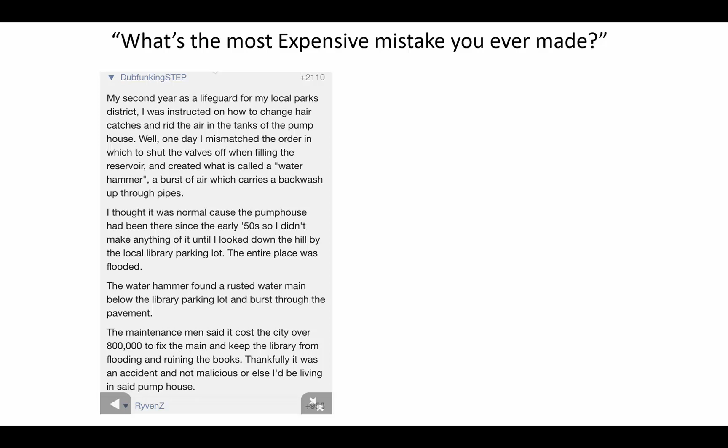That's brutal. So this person, I don't think, is a hydraulic engineer, and they haven't exactly described what causes a water hammer, but they have described the stakes. You know, if you have a water hammer and haven't prepared for it, or if the system isn't designed to prevent it, then it can be a very costly problem. So that's what we're going to be talking about today, is what causes water hammer and how can we prevent it.

All right, well, let's watch a couple of videos that illustrate what water hammer is. These are some real live illustrations of water hammer, and then an old-timey video. It must be from the early 80s, but man, I really like it. It just shows water hammer so effectively. So let me pull up these videos to show you what water hammer looks like and how you might encounter it in the real world.

I've clicked on the link here. Hopefully it's bringing up somewhere. I'll just copy and paste that into a separate tab. That may ultimately be a little bit easier. All right. We may get some commercials we have to suffer through. We don't. Not on this one anyway. All right, water hammer.

So, the sink was opened and then is being closed very rapidly. So let me start at the beginning in there. So the faucet is running and then is being closed very rapidly. Okay.

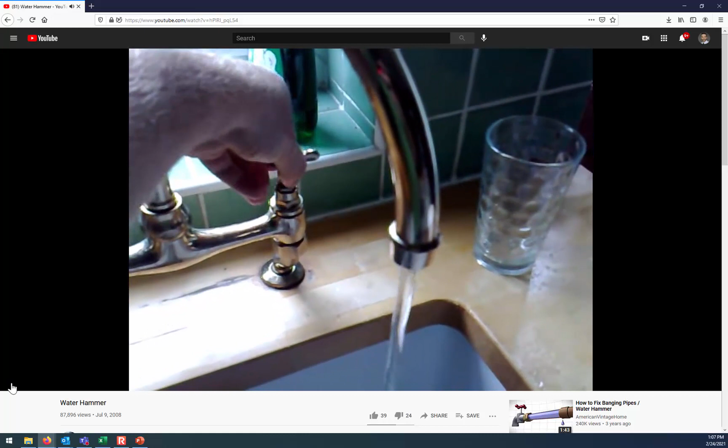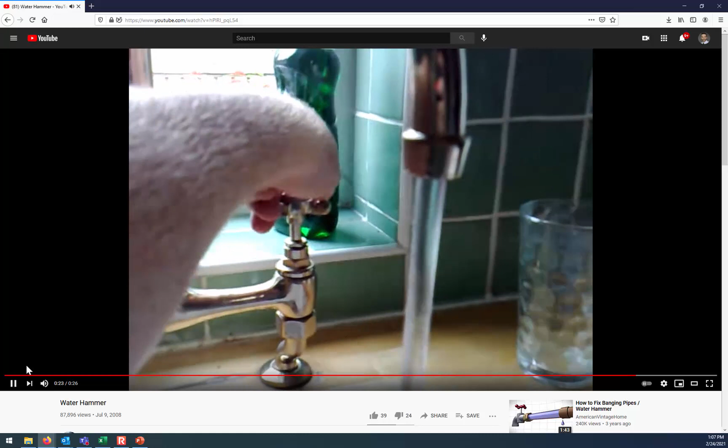Okay, so those quick changes to the flow rate is what caused the phenomenon that we're seeing of this rapid change of, it kind of looks like a sputtering or something. So that's our first physical manifestation of water hammer.

Let's look at another. Let me just copy over the link for this next one. Somebody's washing machine.

We're going to have the commercial for this one. We don't have to listen to it though. Oh, all right. Hopefully you get the system audio.

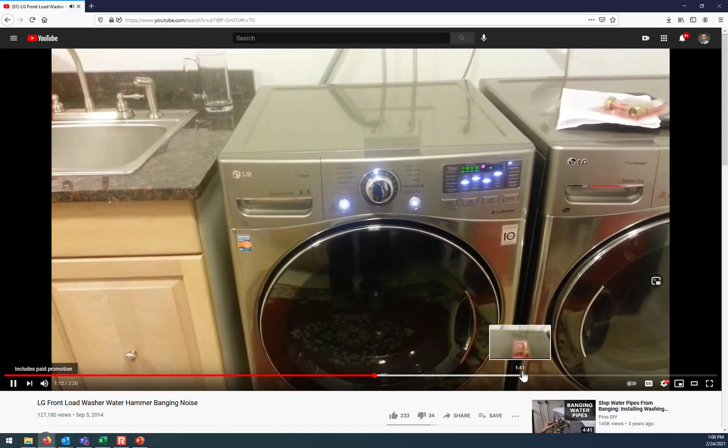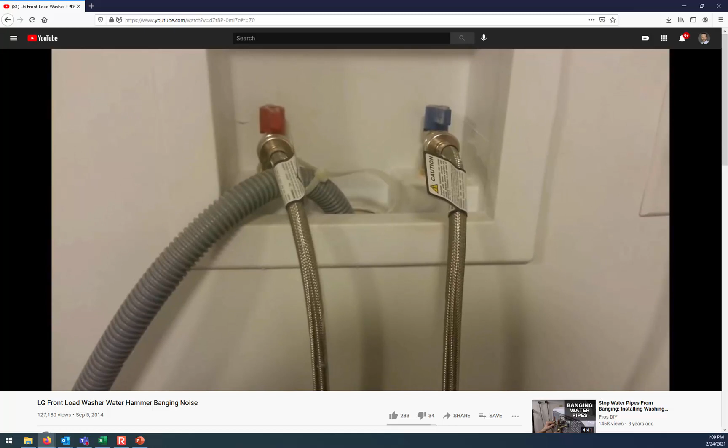I'm not sure. Okay, you heard that noise come from the pipe. I'm going to get closer. We're going to see the action over here. You see the whole pipe shake. That's from the cold water valve. And there's one solution to take care of this problem. You actually have two. You either lower down your house water pressure, or you have to get yourself one of this guy called a mini water arrester that you can pick up in a plumbing store.

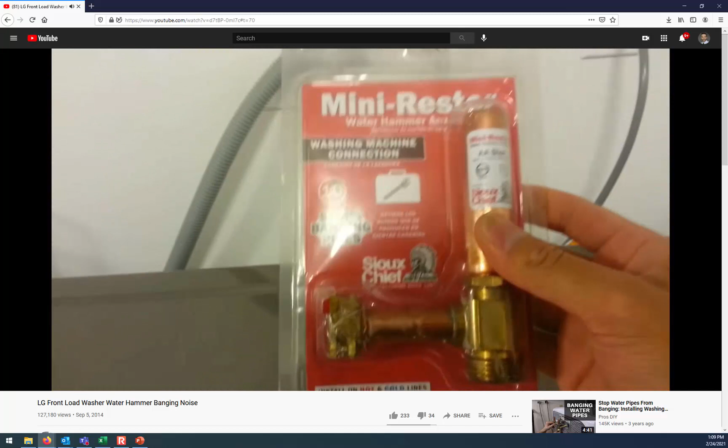Okay, so what's happening here is that the washing machine is drawing some water from the line, and it's opening and closing the valve really quickly, and so it's kind of sending a shock wave through the entire water system as the valve is being opened and closed almost simultaneously, bringing in a little bit more water for the load. And what this person is suggesting is that there are these shock absorbing systems that can be put in line, and it's almost like a spring in there that the shock would work against rather than reflecting its way down the line entirely.

So let me just show you one more video, and I've saved the best for last. This is one where, even though the equipment looks a bit old and dated, it does a great job of explaining what is the cause of water hammer.

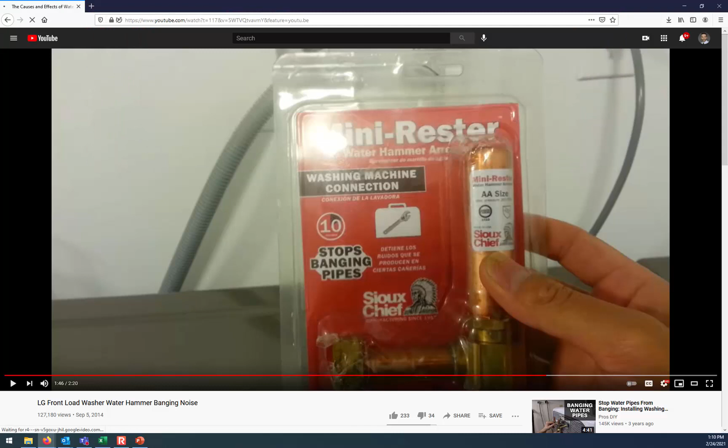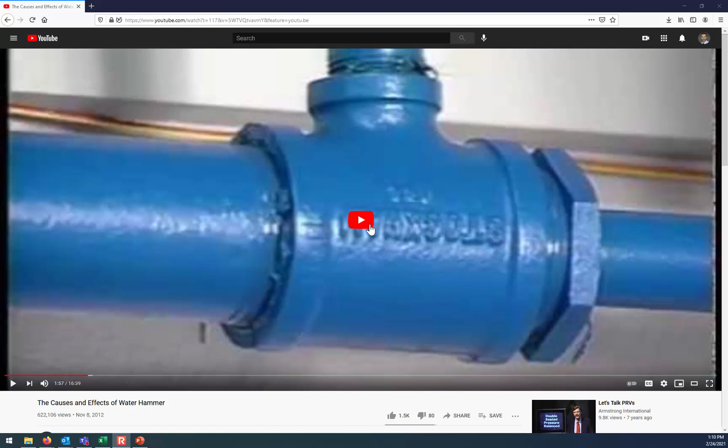Hydraulic shock occurs. Been mentioned so far, the key idea of momentum, that you've got this body of water that's in motion in the pipe. It's headed towards the outlet, and the valve that was closed there, that ball valve, just with a quarter turn instantaneously will have the water going 10 feet per second, and then it's going 0 feet per second. And so all of the force of that water strikes up against that valve that's been closed, and then the shock wave goes the other direction. It may terminate at a water heater, at a reservoir, and then it reflects back again towards the valve a second time. So this is momentum.

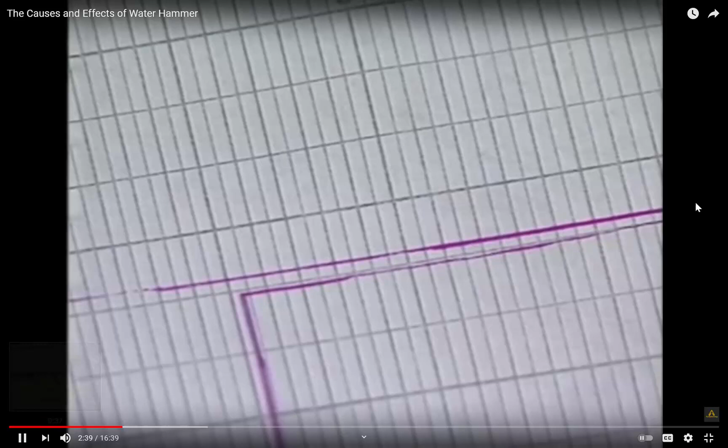The water's moving and suddenly stops. And that's what causes this hammer. It's just like a physical hammer, force divided by area. You've got the force of the water stopping very suddenly. By closing the valve slowly, the velocity of the water is reduced before the column is stopped. Water hammer may also be initiated by thermal shock.

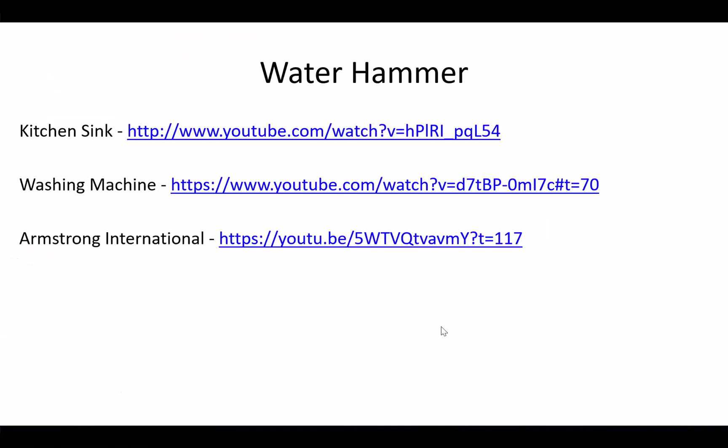All right, we're not going to talk about thermal shock, but that gives you the idea of some of the causes of water hammer. And let's talk about it on a fundamental level by looking at this diagram that comes from our textbook.

Okay, so what I'd like you to envision is a tank that's open to the atmosphere, and there's a pipe coming from that tank. It could either be horizontal or it could be inclined. It doesn't necessarily matter. This is showing it as inclined just to make the point that the phenomenon exists regardless of the inclined path. And so there's some water velocity initially. We've got a valve that's open, and so flow is going through the pipe.

And let's consider the pressure situation as flow is going through the pipe. We know that there's going to be head loss, and so here this is indicating that there's some h_f. So the head loss that occurs is because of the pipe friction. As the water is flowing through the pipe, there's a resistance to flow at the boundary between the water and the stationary pipe material. And the pressure is decreasing in the direction of flow. So this valve is open.

Then, if we consider a certain control volume, think about the flow that's going in and the flow that's going out of that control volume right now when the valve is open. The inflow and the outflow are equal at this current steady state.

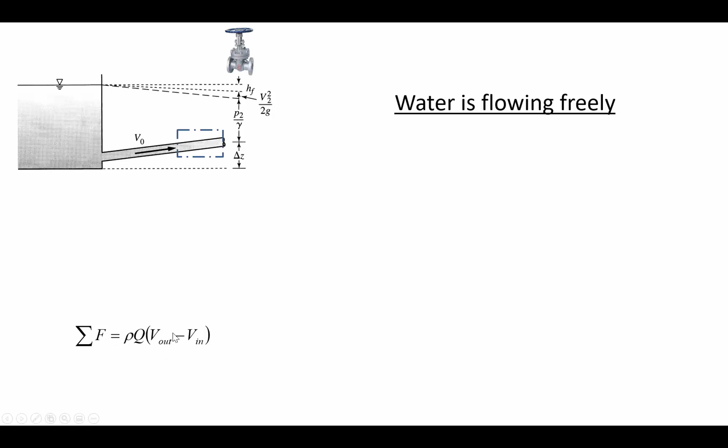So if we were going to consider this through the momentum equation, there's not going to be any imbalance in forces right now because the outflow and the inflow are equal. And the momentum force only occurs when the inflow and the outflow velocity is different.

So if the valve is suddenly closed, then what happens is, in this same control volume, for just a brief moment, there's an accumulation of force up against the valve because temporarily the flow in is greater than the flow out of that control volume. So there's an imbalance in the velocities, which causes an accumulation of force up against the valve. And that causes pressure to build up.

And now what we have here is that when the valve is closed, there's no longer any frictional losses. And so looking here, this dashed line, the lowest dashed line, refers to the energy grade line. Now it's flat. And so it's flat because there's no bulk flow. The water isn't moving through the pipe anymore, even though if you go a little bit further away from the valve, the velocity is still forward. There isn't a net flow through the pipe. It's just this temporary, instantaneous moment where the momentum really hasn't caught up with the entire column.

Remember, the water is just a little bit compressible. And so the pressure wave starts propagating backwards towards the reservoir, and the speed that it does that is called the celerity. And so here you can see C. That's referring to the velocity or the speed at which the shock wave is going back away from the valve towards the reservoir.

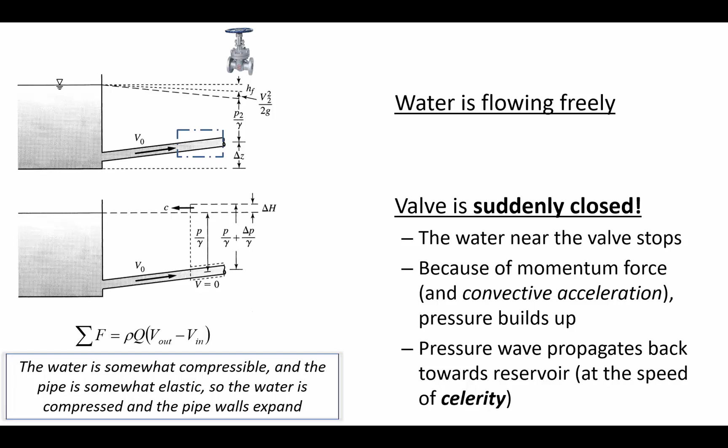So as we go further steps through the process, there comes a point where the shock wave makes it all the way to the tank. At this part, the shock wave was only part of the way through the pipe, but the shock wave is moving its way through the pipe, and this whole process is very, very fast. We're talking about milliseconds. So it's moving from the valve back towards the tank, and now at this point, the entire pipe is expanded because the shock wave is all the way through, and so everywhere inside of the pipe, there's an increase in head, and also there's a little bit more water inside of the pipe than there ought to be, because remember, the pipe expanded, it swelled, so to speak.

And so what's going to happen is that pipe is going to start to not collapse, but it has swelled and expanded, and it's going to contract again, and that's going to force water into the reservoir. And so in the return journey, the shock wave goes from the reservoir back towards the valve again. Here you can see the C is indicating the direction and the magnitude of that celerity as the shock wave moves from the reservoir back towards the valve, and then the water is flowing from the pipe into the reservoir as the pipe contracts. And so it's a wave of decreased pressure heading towards the valve this time. And that process is called wave reflection.

And it can happen several times. In the video that we just watched a moment ago, when they closed that valve really quickly, you could see on the little plotter that they had that there was a big spike in the pressure, and then there was a little spike. It was kind of like aftershocks or several subsequent waves that progressively got smaller because some of

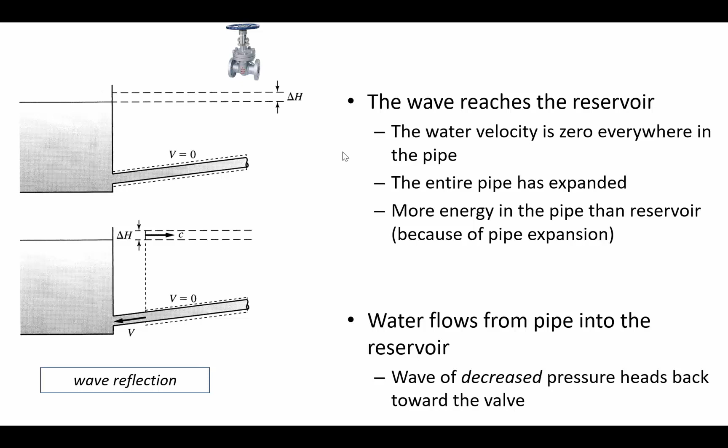Okay, now in fluid mechanics, we talked about bulk modulus of elasticity and how it's a property of fluids that describes how compressible that fluid is. And so if you know some increase in pressure, then you can understand the change in the specific volume of the fluid. And so if we think about water, for example, a unit mass of water, so a kilogram of water occupies 1 liter of space, or 1,000 kilograms of water occupies 1 cubic meter of volume.

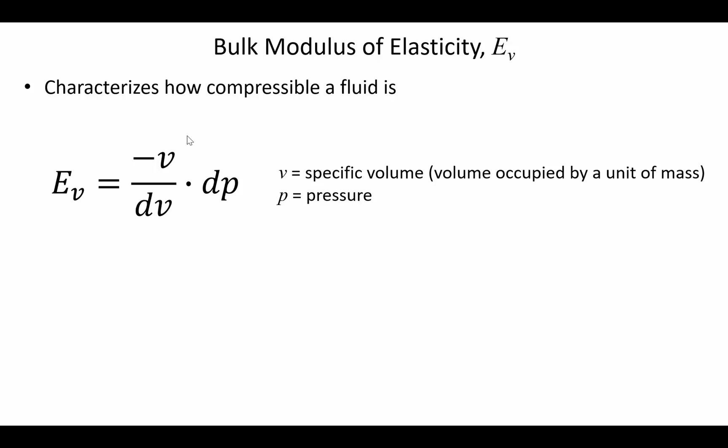So instead of saying mass per volume, specific volume is volume per mass. And so the bulk modulus of elasticity is that relationship of how an incremental increase in pressure changes the volume occupied by a unit mass of a fluid. And you can look up the bulk modulus of elasticity. Here is a table for the E sub V for water in the traditional units.

You have a question related to this idea of water hammer in your homework, and so I wanted to point out that the table that's in your book, table 2.3, has bulk modulus for water, but there's actually an error in the textbook. They're saying that it's these numbers that are divided by 10 to the 9th, but actually it should be multiplied by 10 to the 9th to get the bulk modulus in terms of newtons per meter squared.

So you can know the temperature of the water and what pressure it exists at and look up the bulk modulus. And we're going to do that with an example today. We'll do a sample calculation just to give you an idea of how quickly that water is able to move through the pipe.

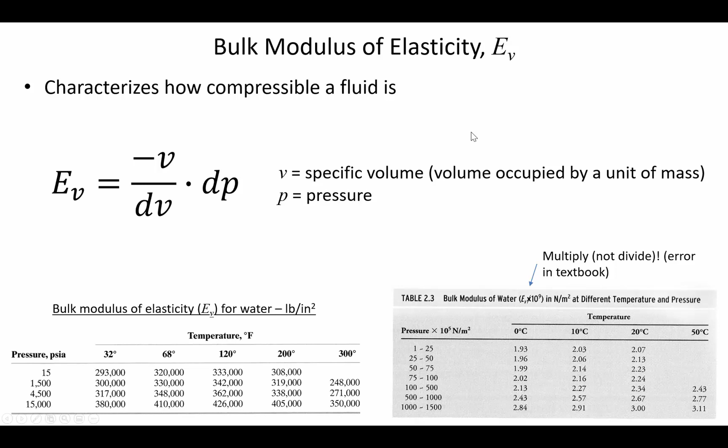Okay, so celerity, it's the velocity of the pressure wave, and you can calculate the theoretical celerity as how quickly the shock wave would be traveling through a fluid of infinite extent, meaning that it exists in all directions. Because the shock wave travels through water that's in a pipe at a different speed than it travels through water that is open in all directions.

And so the theoretical wave celerity depends on the bulk modulus of the fluid and the fluid's density. And it's going to have units of length per time. The units that you're going to get out of this would be like meters per second or feet per second, how quickly the water is moving. And it varies depending on the density of the fluid and the temperature of the fluid.

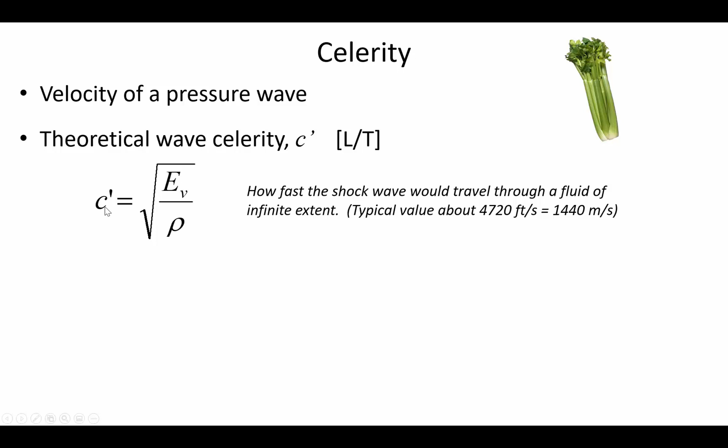But for water, a typical value is that a shock wave would move through unconfined water at about 1440 meters per second. So when you're given a problem, the first step is to calculate that theoretical wave celerity for the temperature and fluid conditions that are described. Then the next step is that you have to consider what kind of a pipe that you have. It's going to depend on the

pipe modulus, and so here the E sub P is talking about the modulus of elasticity of the pipe, where E sub V was the bulk modulus for the fluid. Here is a table from our book, table 8.6, that's talking about the modulus of elasticity for different types of pipe. And so you can see, for example, that lead is a relatively flexible pipe, and it's going to expand and contract really easily because its modulus of elasticity is only 3.1 times 10 to the 8th.

In comparison, steel and iron are much stronger, so they're not going to expand and contract quite so much. So how the pipe is expanding and contracting has an effect on the effective celerity of the wave in a confined pipe.

Also, you have to know the thickness of the pipe, because that's going to have an effect on how much the pipe expands and contracts as well, because a very thin-walled pipe is going to expand and contract more than a thick-walled pipe would be.

And so notice that here in the denominator, this ratio that's on the right-hand side is the modulus of elasticity for water, the pipe diameter, and whatever units you have, like if your pipe diameter is inches and the thickness of the pipe is inches, that's okay. You don't have to necessarily convert it over to feet, or if it's centimeters, as long as the units in the numerator and the denominator are the same, then you can use a little shortcut there, and even have mixed units if you like. You could have your fluid modulus values in SI units and your pipe diameters in traditional units, as long as it canceled out, because it's going to be a ratio that you're looking for.

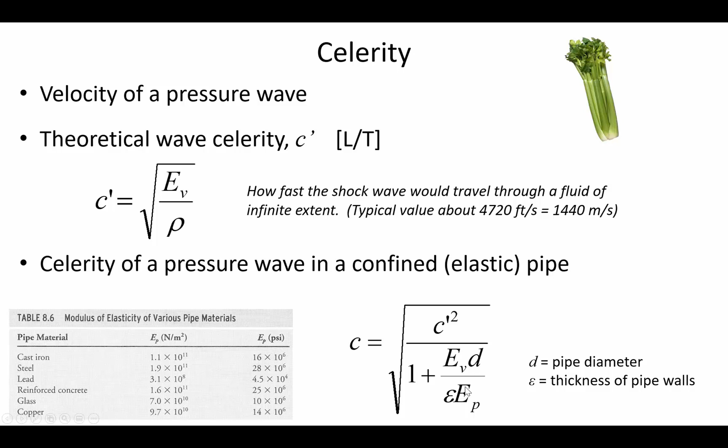So you calculate the celerity of the pressure wave, and then to know the travel time, we have to consider twice the physical length of the pipe, because it's the round-trip travel time that is the governing factor here. This valve is going to be closed, and so the question is, for the conditions that you've got, what is the amount of time that you should wait to close the valve? Because the shock wave needs to go from the valve to the reservoir and back to the valve.

And so if you close the valve in more time than this travel time, then you'll avoid the worst of the water hammer. But if you close the valve faster than this T sub L, then that's going to cause this maximum increase in pressure that's going to really be problematic. And you can calculate the magnitude of that pressure increase by multiplying the initial velocity of the fluid before the valve was closing with the celerity of the shock wave and the density of the fluid. And then that delta P is going to tell you how much the pressure could increase.

And as I kind of hinted at before, the worst case scenario is that you close the valve very quickly. And what I mean by very quickly is faster than the round trip travel time. And if you close the valve slowly, meaning it takes you longer than the round trip travel time to close the valve, then you won't have this maximum increase in the pressure.

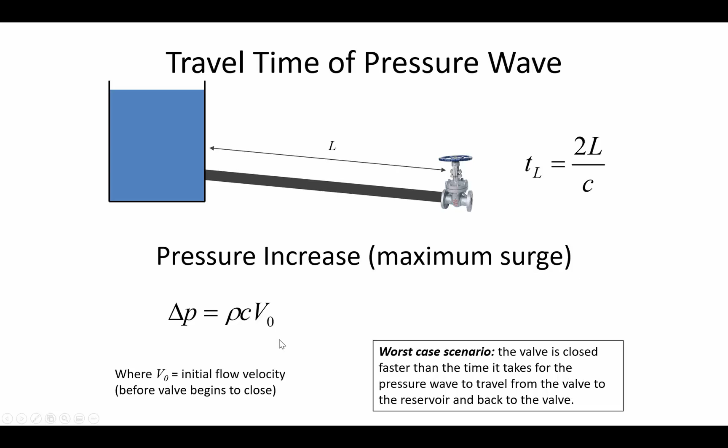So let's go through the process of calculating the magnitude of the pressure increase and also the travel time that's required to avoid that pressure increase for the system that's summarized here in this problem statement, where the physical length of the pipe is 2,000 feet. We know it's a 4-inch steel pipe, and here this thickness of the pipe is 0.2 inches, and we know the pipe modulus here and the water modulus and density.

And the calculations that you're going to need to go through are kind of sorted, the formulas are in order here. First things first, you need to calculate what is the initial velocity based on the 0.6 cubic feet per second, and if you know the cross-sectional area of the pipe, then you can calculate the velocity from that. So you'll calculate the theoretical wave celerity, the celerity for the confined pipe that's actually described in this problem statement, the maximum pressure increase, and we'll also determine the round-trip travel time.

And I give you this hint, since we're working in the traditional units, keep in mind that here where we've got the density is 1.94 slugs per cubic foot, keep in mind that a slug that is accelerated at 1 foot per second squared has units of pounds force. So the fluid density here, we're going to need to keep that in mind as you do the calculation.

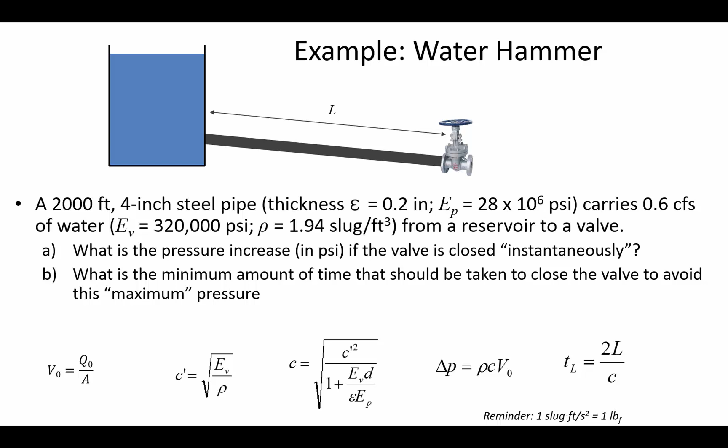Alright, so you're coming back into the main room now, and let's take a look at the solution together and just see if things were headed in the right track. And of course, this plays into the homework assignment that you've got to submit next week.

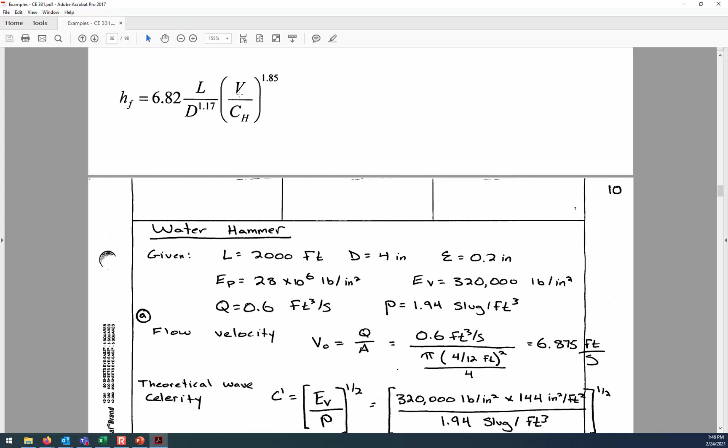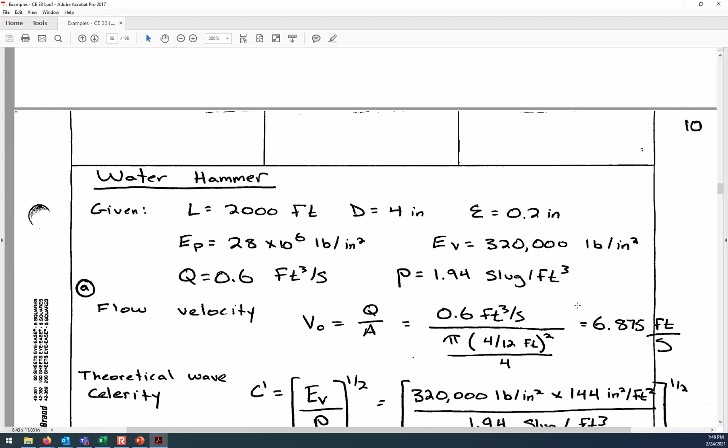Okay, so we start just with a summary of our given parameters for this system, the pipe's length and the fluid properties and the pipe properties that we know. And so what I've calculated is the initial velocity is 6.875 feet per second. And then the theoretical wave celerity started by converting the fluid properties from pounds per square inch into pounds per square foot. So we have to multiply by 144 to make that conversion, because if there's a certain amount of pounds in a little square inch, there's going to be many more of them in a square foot, since a square foot is 12 by 12. And so we've multiplied by 144 there.

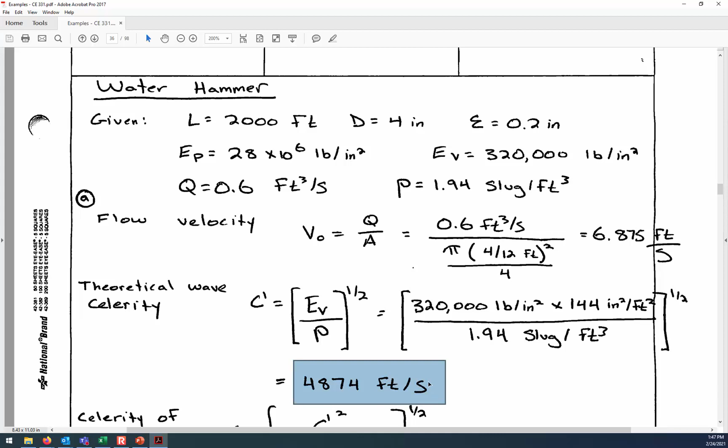And then you can just use the density in terms of slugs per cubic foot. In that case, you don't substitute in the unit weight, which is 62.4 pounds per cubic foot, but here we actually need to know the density of the fluid. And so this is the theoretical wave velocity if it's unconstrained in all directions, but then when you route that through a pipe, it slows down the shock wave slightly because of the expansion of the pipe. And so that effect is accounted for down in the denominator here, where we've included both the diameter of the pipe and its pipe thickness.

And you see that I didn't necessarily bother to convert all of those into feet units, that leaving it in inches is fine because we've got a ratio of PSI to PSI and a ratio of inches to inches. So it can just stay as it is. And the output from that theoretical formula is that the velocity of the wave is 4397 feet per second.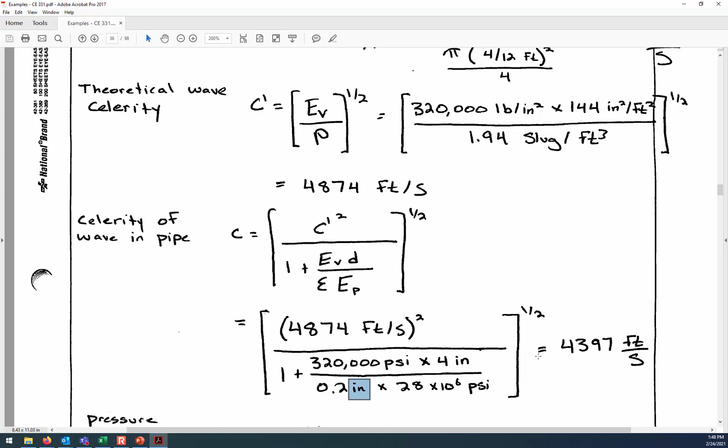Okay, so the increase in pressure that we're going to get when it was initially going 6.875 feet per second, and we know the fluid density and the celerity of the shock wave, this is going to bring the pressure up really high. 407 psi is definitely in the danger zone. There's a good chance that whatever fittings we have could begin to leak or maybe even burst. If this pipe was welded together, those welds may not be rated for this pressure increase, and so we would need to really be cautious about closing the valve slowly to avoid that shock wave. And a lot of the computerized controls these days have the option of programming the rate of valve closure.

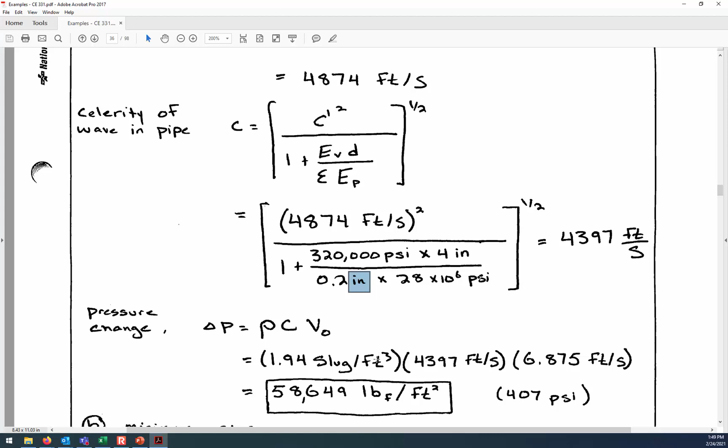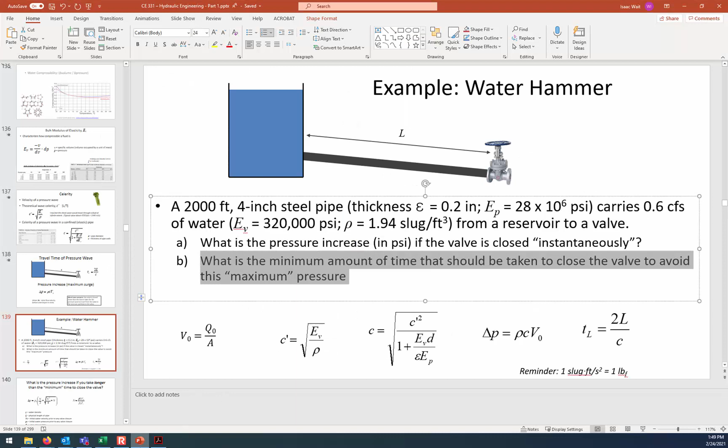And so the second part of this question that it's asking is what is the minimum amount of time that we would want to take to avoid that maximum increase in pressure. And so the closure time is the round trip travel distance divided by the celerity of the shock wave. And so as long as we close the valve, if it takes you more than 0.91 seconds, then this isn't going to be the pressure that's achieved. It'll be less than that.

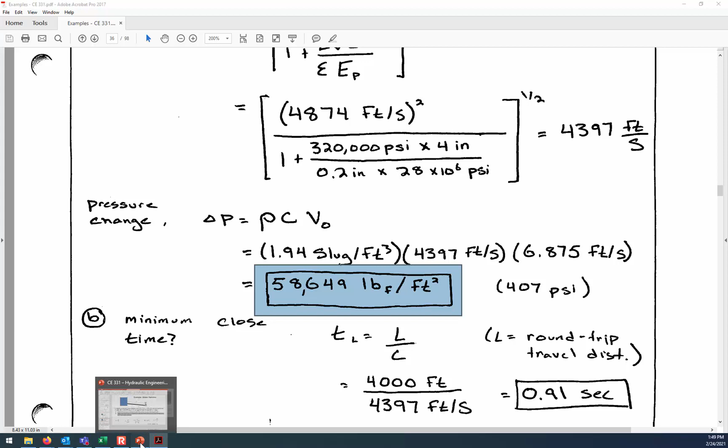It's not that there's no pressure. So if you closed it in 1 second instead of 0.91 seconds, it's not like there's going to be zero increase in pressure. It's just that there would be a reduced pressure increase. And here's the formula that tells you what would be the pressure increase if you close the valve more slowly. It's kind of an empirical equation, and we won't have any application of that in the homework assignment.

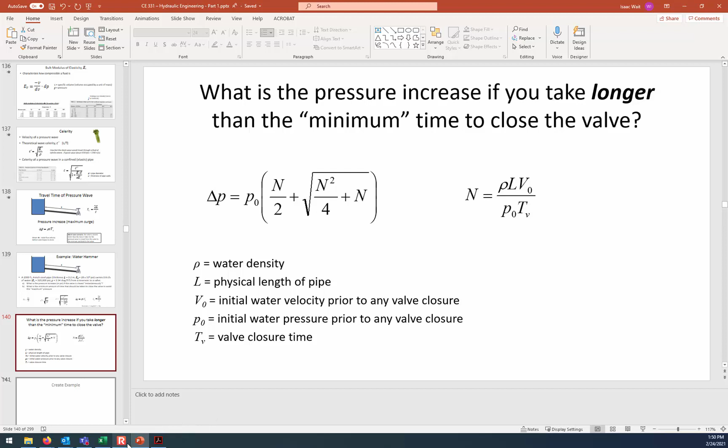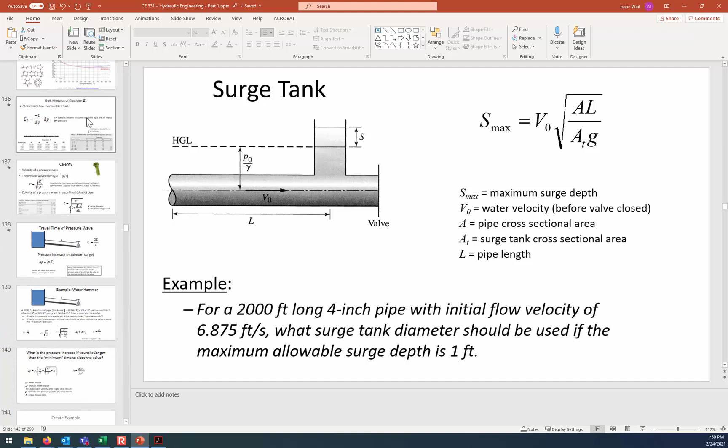Now, unfortunately, I've just burned through all of our time. It's 1:50, and I didn't get a chance to show you the example that has to do with the sizing of the surge tank. And so what I'm going to do is I'm going to include this example in the recording that I post for Friday's class. And so then you'll have all of the information you need for the homework that this all goes on. Remember that homework 5 has your Hardy Cross problems and then a quick look at water hammer and surge tank sizing, and that's due on Monday of next week.